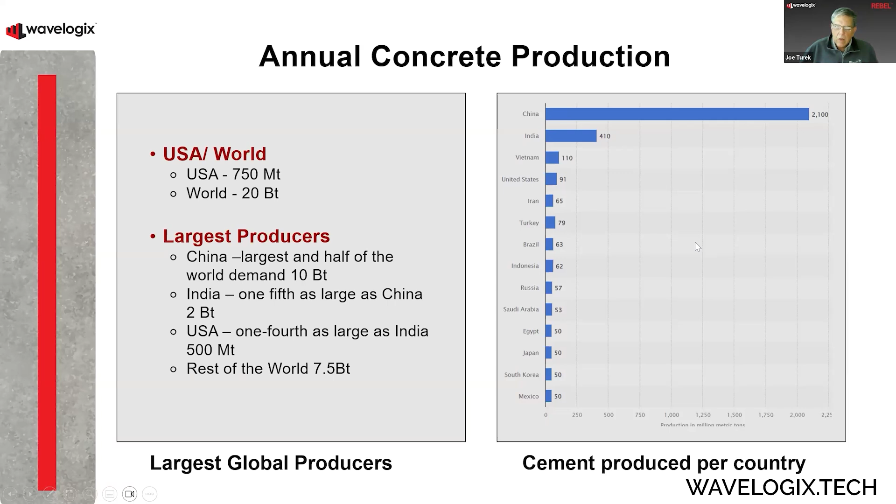Now, when we talk about cement, not a lot of people - we always talk about concrete, but not everybody knows how cement is made. The reason why it gets a bad rap with a high carbon footprint is if we just look at how it's produced.

Cement is quarried from a limestone quarry, then it's trucked over to a crushing machine. It gets crushed and then put into a finer powder. And then we mix in things like clay and sand to be able to create a chemical reaction. We grind it again, mix that all up.

We start to heat it, and then we fire it in a kiln at 1450 degrees centigrade. We take that stone and drive out all the moisture and water out of it and create a new stone combination of that sand, clay, and limestone into a clinker. So we create another stone, and then that clinker is cooled.

We mix in some fresh gypsum with it. We grind it up, turn it into a powder, and then we put it in bags or shipping containers, and off it goes to the end customer. So it's kind of a fascinating way to make the cement that we use today. And the nice thing about cement is that it can actually be transported economically around the world.

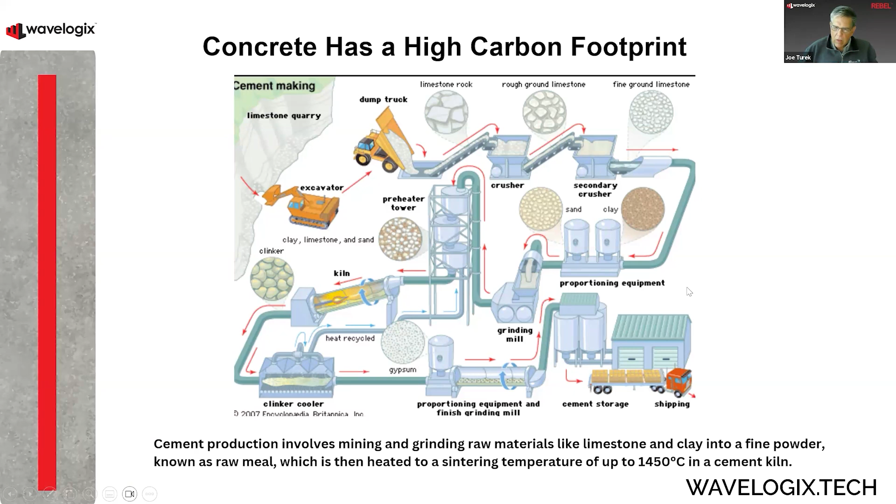If we look at the overall use of cement in the carbon footprint of everything in the world, it represents 8% of the entire carbon footprint. And although it's the smallest portion of what's being produced in the world, it still is incredibly significant.

Not only that, when you take cement that we've cooked at 1450 degrees centigrade, and then we add water to it, it's an exothermic reaction, so now it's releasing even more heat in the operation. Usually when you pour concrete, that temperature can get up to around 70 degrees centigrade. So it's a big producer of heat—it uses heat to create itself.

And because of that, every pound of cement releases about 0.93 pounds of CO2, almost a 1-for-1 in cement. And again, cement accounts for approximately 1/7 of the total weight of concrete.

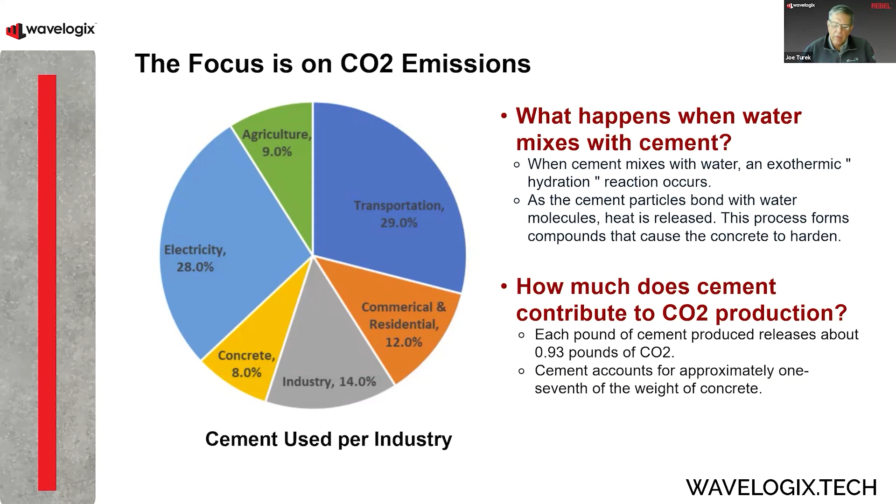So why is that important, and what happens in concrete? When we pour concrete, concrete is great, but what we need to do for our next operations is understand what the strength of that concrete is. Concrete, when it cures, is going to cure somewhere around 3,000 to 5,000, and really high concrete strength might be 10,000 PSI.

But there's a lot of operations that we do early on, within the first couple of days. It gets to a certain amount of strength that allows us to do things like remove our scaffolding, remove the forms, post-tension the concrete, cut it, and do our next operations, release traffic if you're building a road. Those all happen in the first couple of days.

Final strength takes about a month for concrete to cure to about 97 to 98% of its total strength. So it's a long time to cure, but early curing is really important for us to do in the next operations. So how do we know what that strength is?

Well, the 100-year-old technology has been to use a companion cylinder or companion beam. Then we take those cylinders at periodic intervals—1 day, 3 days, 7 days, 14 days, 28 days. We crush those cylinders and we determine what that strength is at that particular time.

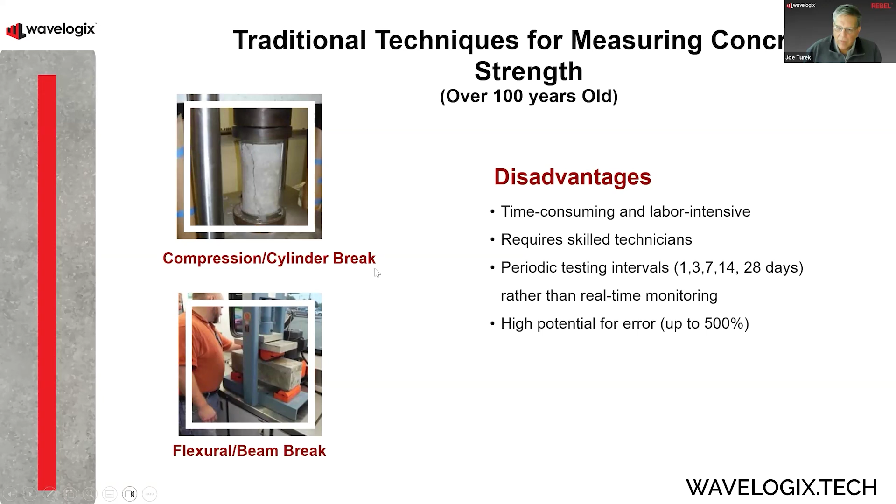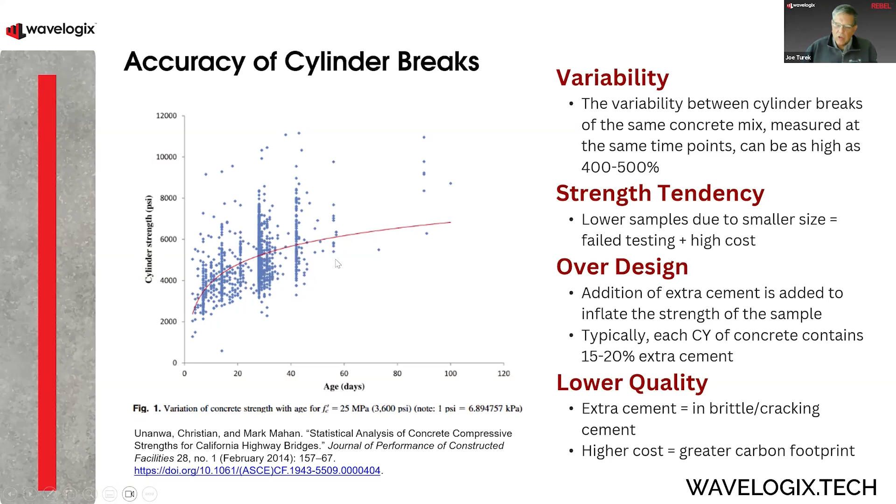And that's a problem in our industry today that we've experienced—our technology to determine the strength has been inferior to its actual true strength. We'll keep that in mind.

If you look at the impact of those cylinders that we're doing and using for testing purposes, we produce about 15 cylinders for every 100 cubic yards of concrete. Those 15 cylinders—usually 3 cylinders are broken at 1, 3, 7, 14, and 28-day intervals. They represent about 150 pounds of concrete per test. That's huge. If you do the math on that, that's 750 million tons of concrete used in the USA alone, which turns out to be about 40,000 tons of cement if we convert that over to cement in that concrete.

Those 40,000 tons of cement translate to about 38,000 tons of CO2 produced annually. And if you look at it on a worldwide basis, that's 1 million tons of CO2 that we're producing just by using cylinders for testing. And then we throw those out. So not only are we overproducing CO2 with cylinder testing, but we've created that much more waste that has to be landfilled or disposed of.

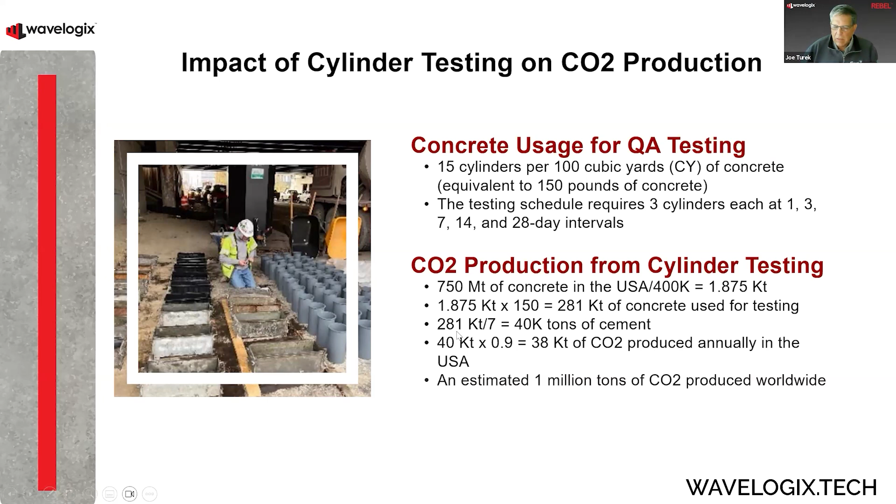But that's not the whole picture. So cylinder testing is one of the first problems with CO2 generation in concrete.

But the second one is because the dirty little secret is contractors are paid for final strength. And if they don't meet the final strength of their specification—so a concrete mix might be specified at 5,000 PSI—typically at either 28 days, and today it's getting even tougher, maybe 56 days, the contractor has to hit that strength or higher that they were contracted to do in 28 days.

Now, if you saw in the previous slides where we might have a 400 or 500% error in actually getting to that strength, what does the contractor do to guarantee that they're going to get paid? Well, human nature is we end up adding about 20% more cement to that concrete mixture than is needed to guarantee that we get to that strength and get paid.

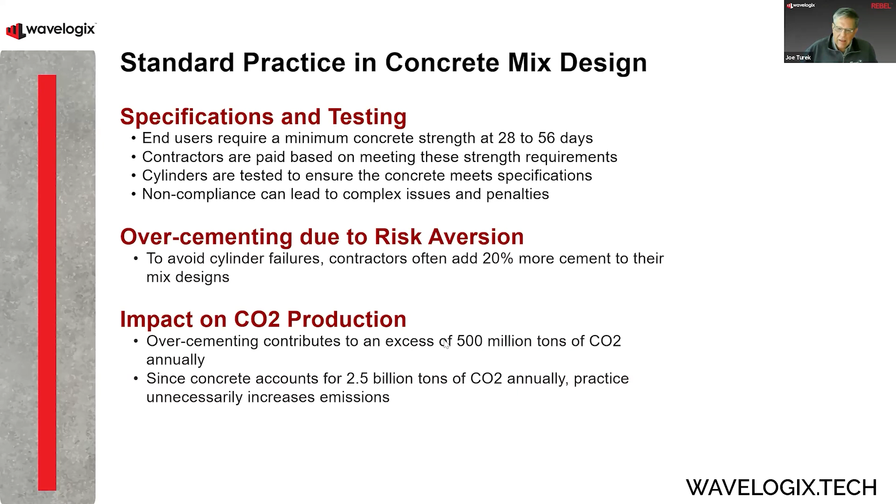Because if you don't get to that strength, a couple things can happen. You get paid less, you don't get paid at all, or you might be required to remove the concrete structure you put in place and replace it to get there. So hitting strength is really important. And if you look at that 20% of excess cement, we're going to be producing an extra 500 million tons of CO2 annually. And that's a big number because of that.

So what are the other things the industry is trying to do to reduce the carbon footprint of cement? They're looking at replacements for cement—let's substitute some of that cement. So if you don't have to use all the cement, let's try and replace any percentage of it. Right now we're targeting about 25% replacement of cement.

We've been using some replacement forms called SCMs, supplemental cementitious materials, and those have been byproducts of some of our industrial processes, like slag production that comes out of the steel industry, and fly ash that comes out of coal production in energy production. Those are some of the SCMs that have been used classically, but those processes are going away in the United States. So now we're looking at all sorts of other types of things that can cut down the use of cement and replace it.

And as we're doing this in the industry, we're adding some more limestone, for instance. We're adding other SCMs, and we're coming up with new materials. But every one of those new materials has to be defined and tested. We need to make new mixes. And when you make new mixes, you need to create more cylinder breaks to be able to determine the strength.

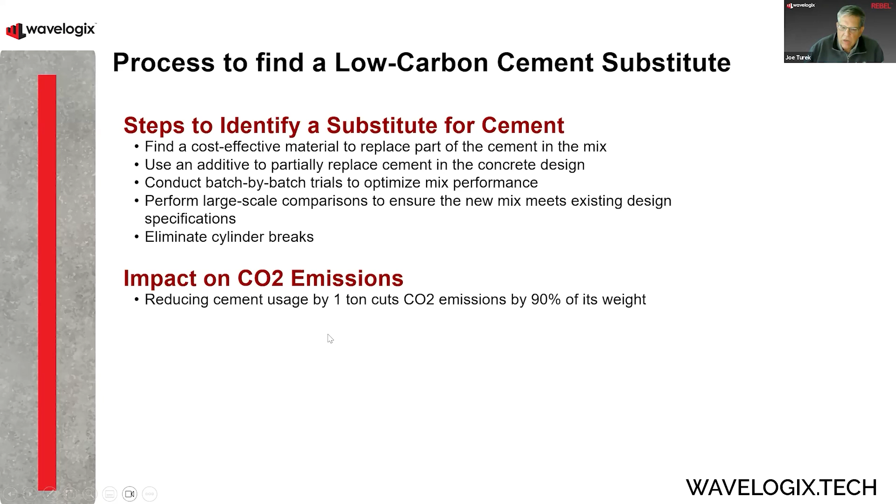But if we can reduce the amount of cement used in concrete, for every ton it cuts almost another ton of CO2.

So this is where the Rebel system comes into play, which is what's really kind of exciting about our technology. One of the first things we're trying to do is we've got an IoT type of sensor, and this sensor is embedded in concrete. It's plugged into a data logger, and the data logger takes the information, the data it collects from that sensor, and then sends it to the cloud.

Our technology is working towards eliminating the need for using cylinder breaks, because we're giving real-time concrete strength as the concrete cures. And that's what's so cool about our technology, really—it's accurate, it's reducing human error. You don't need trained technicians to be able to produce the information.

And it's a great way to quickly evaluate some of these new low carbon alternatives in their mix designs, because you can come up with a new mix, throw our sensor in there, and we can give you real-time data on how that concrete strength is growing over time. That's really, really powerful. So how does our system work?

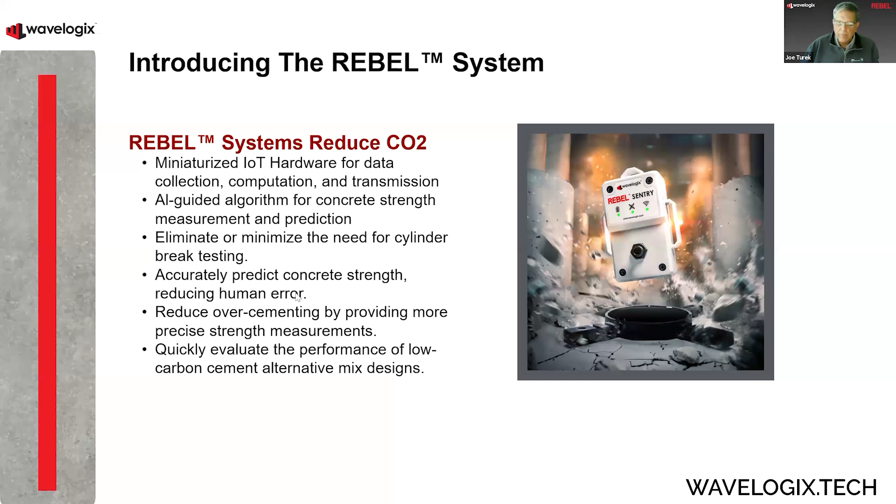As I mentioned, you take the sensor and embed it in your structure. The data logger is not embedded in the structure, it stays outside. It is reusable, while the sensor is a one-time use. That data uses the cellular infrastructure, LTE, and sends the information into our database in the cloud.

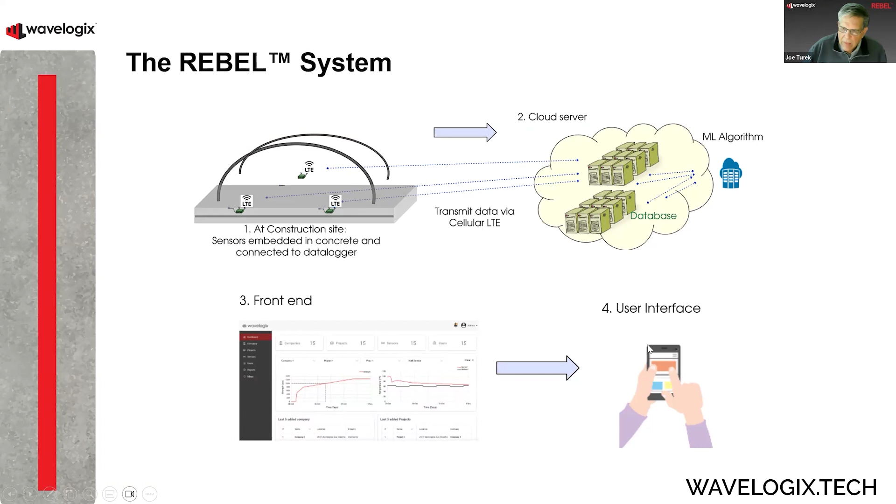We have a machine learning algorithm that works on that data and converts it into strength. That strength is shown on a user interface you can see on your phone, laptop, or tablet, anywhere on the planet with internet connection. The strength curve is what we're used to seeing, a real-time curve showing time in days against the strength being generated, happening over real time.

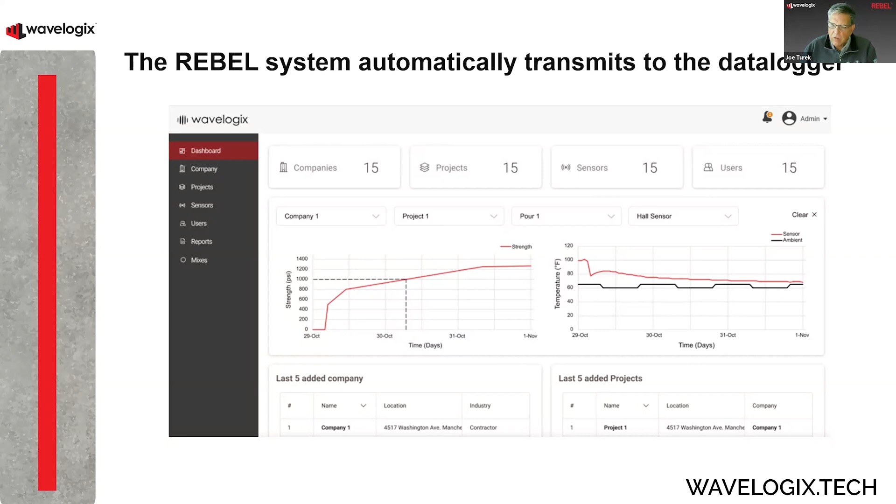We also add temperature probes both in our data logger and in the sensor, so we can show the temperature of the structure in real time, along with the ambient temperature outside the structure. These are also very powerful for use in the contractor world when building a structure, knowing the combination of what the heat is and what the strength is.

How does our product work, and why is it different than cylinder breaks? We're using piezoelectric sensors to actually create a wave that pushes itself into the concrete as it's curing. That way we're measuring the impedance, or the resistance, or the pressure that wave is pushing against the cement.

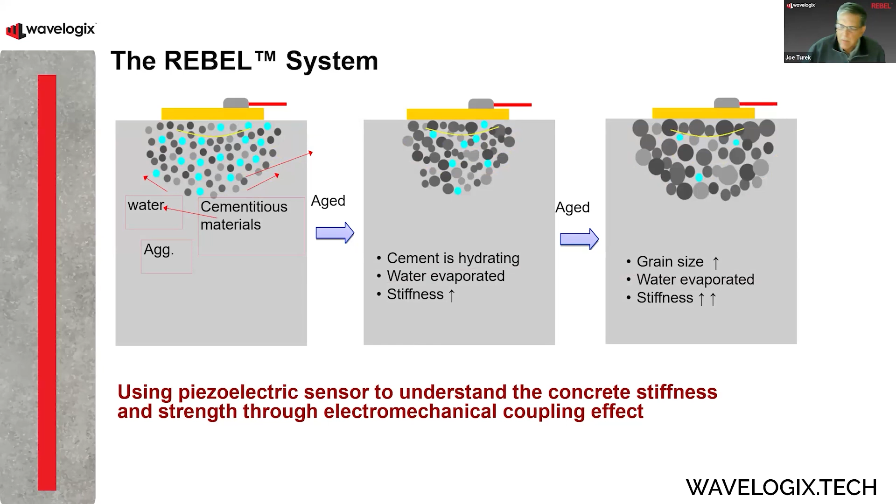Now, what's so interesting about that peak? Well, first, we found that peak non-destructively. We didn't have to crush a cylinder, we just see that peak. That resonant frequency of the structure is proportional to the modulus of the structure, and the modulus is proportional to the compressive strength. So by knowing this resonant frequency, we can determine the compressive strength in real time without a destructive process.

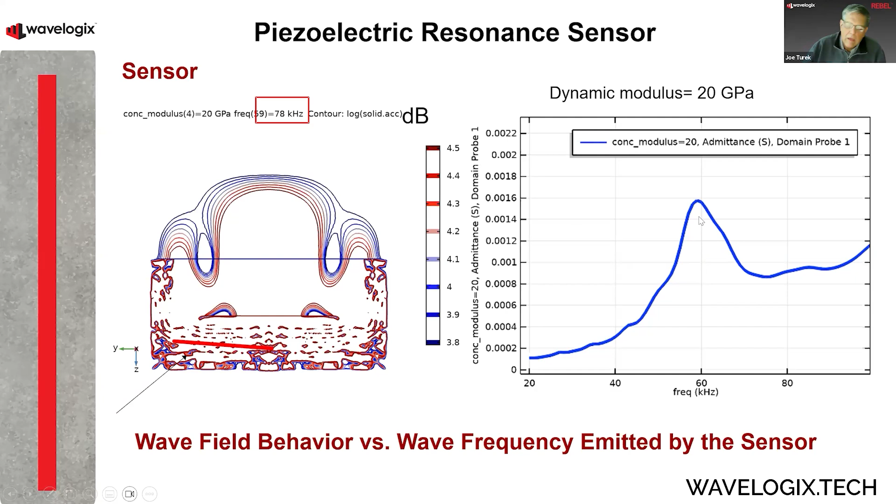Now, the cool thing is you say, well, that works great with a structure that's solid, but what happens when concrete is curing? Well, sure enough, if we embed it in concrete, as soon as there's a modulus, as soon as the concrete starts to harden enough to have some pressure, some strength, we can start to see that resonant frequency, and as it cures, it changes and moves along.

These represent different PSIs: 120, 500, 1100, 2000. We can see that the resonant frequency changes as the modulus changes while the concrete cures, and that's exactly what we would expect. That is the basis and the thrust of our technology today, and why we can do real-time strength more accurately than any other company's product on the market today. It doesn't need to be calibrated, it's agnostic to any type of concrete mix design, and it gives us accurate results.

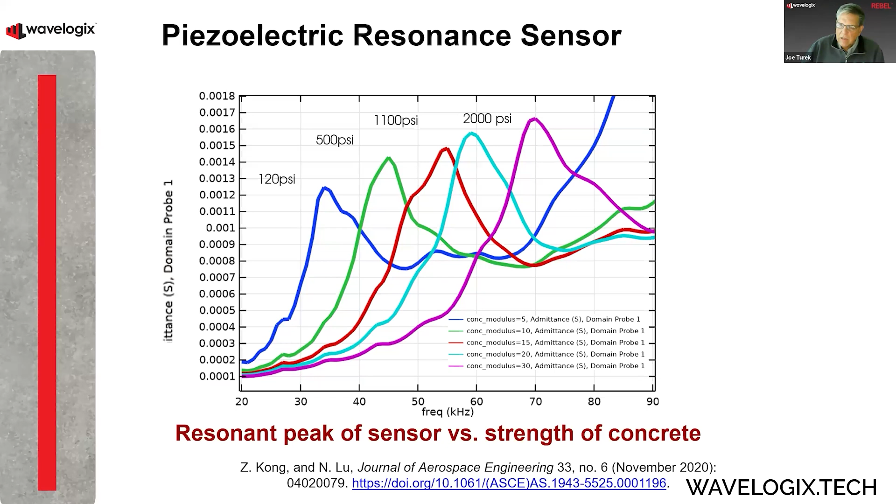So let's add this all up when we look at the carbon impact, what we're doing today. What are the improvements and things we can actually affect in concrete today to help reduce the carbon footprint? Well, cement produced, as we talked about, in the USA is about 100 million tons, worldwide 2.7 billion tons. That impact is about 2.5 billion tons of CO2. Cylinder breaks represent a small portion of it, but still significant.

About 1 million tons of CO2 could be reduced worldwide if we eliminated cylinder breaks completely. Looking at over-cementing, a process done to guarantee contractors get paid, if we give them real data showing they can reduce that right off the bat, we can save about 500 million tons of CO2 just by reducing that excess cement. And if we come up with just 25% cement replacement using alternatives, we can reduce the carbon impact by another 22%, or a little over 567 million tons worldwide. Overall, right now we believe we have in our grasp the ability to reduce over 40% of the carbon impact in a very short period of time, probably by the end of this decade.

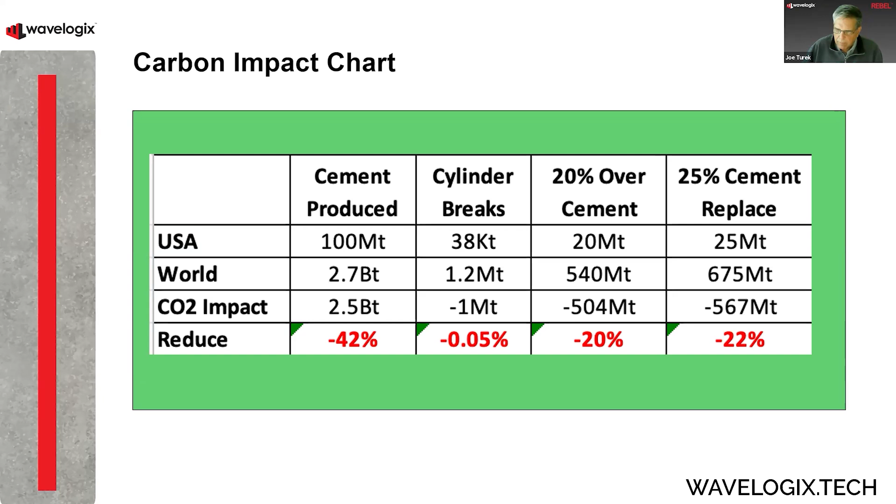So that's where we are today, using our technology to help reduce our carbon footprint with the Rebel sensor. We're doing our part to help reduce over-cementing, analyzing new carbon mixes, and eliminating cylinder breaks.